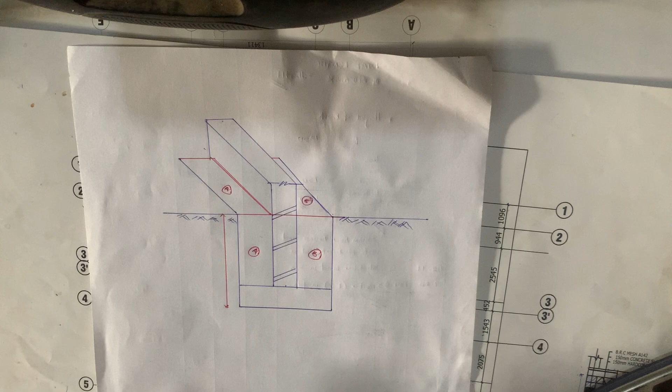In today's video we're going to be measuring for the backfilling in the foundation for a frame structure. This backfilling is the soil that we pour back into the foundation trench after we've laid our foundation footing and our block work.

As you can see in this drawing, this is our foundation trench. You remember that we've calculated the volume of excavation for our foundation trench. Now we need to determine what is the volume of material that we are going to be using to pour back into these spaces. As you can see, at this point marked A, we need to pour materials into this point, and we need to pour materials into this point. So how do we go about calculating for the volume of this backfilling?

Now this is how it is to be done. If you remember when you were doing your measurements as a beginner, measuring for your foundation trench, you would see something like 'anding on', or this sign that looks like 'and'. Let me just do it here. You'll see this sign like this.

Anding on, and they will note 'deduct backfilling and add material surplus'. Now that nomenclature tells you that you are supposed to do something for backfilling, although it is not really calculated during that measurement aspect. But what that means is that when you are going to do your bill of quantity, you have to also measure for the volume of material needed for that backfilling. I don't know if that makes sense. The nomenclature that says deduct backfilling and add material surplus is just to speed up the measurement process.

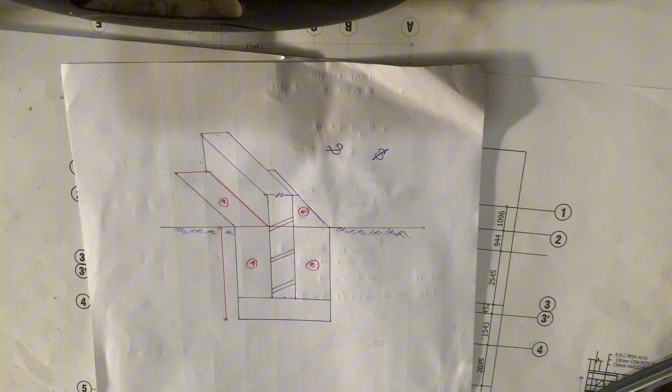But when you now go to do your bill of quantity, backfilling is also an item on its own that needs quantity for you to get the amount needed for the backfilling, so you need to also calculate for the backfilling separately. In this video I am taking my time to do everything properly so that in the future you will not have any problem. If not, I would have just gone ahead when measuring for the foundation trench, written deduct backfilling and add material surplus, and moved to the next one. But I am trying to take my time so that you can understand this properly.

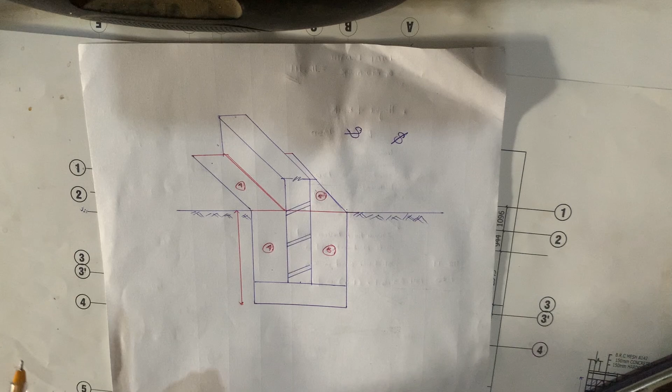So if you look at this diagram, this box here is the trench that we have excavated. I'm going to take you through the process so you can understand how to measure for this backfilling. This is our ground level, or our strip level rather. We've removed our topsoil, so this is our strip level. After that, we excavate for our foundation trench, like this. After excavating, we now lay our concrete in the foundation, right here. And after laying the concrete foundation, once it has set, we now started laying our block work.

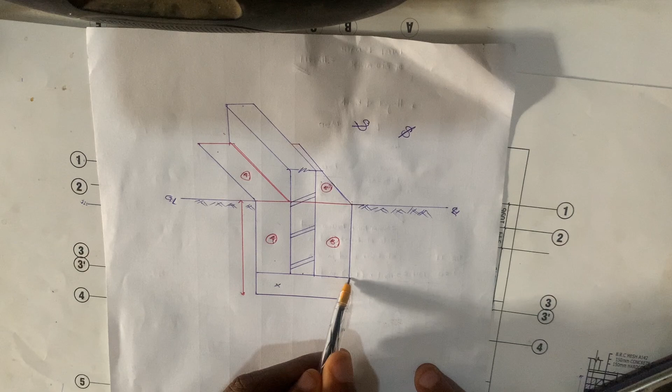So now, to determine the volume of A and B, we've already calculated the total volume of our excavation in our previous work. All we're going to be doing now is taking that volume of excavation in the trench and minusing the volume of our concrete footing inside the trench, because the volume of our excavation is in meter cube. So we need to minus this volume here. If we minus this volume, whatever remains is going to be the volume of this box on top, this total box on top.

Moving to wherever the perimeter of the foundation trench is in the drawing, so like I said, we've determined the volume of our earthworks. We will now minus the volume of the concrete footing, then whatever remains, we will now minus the volume of our block work.

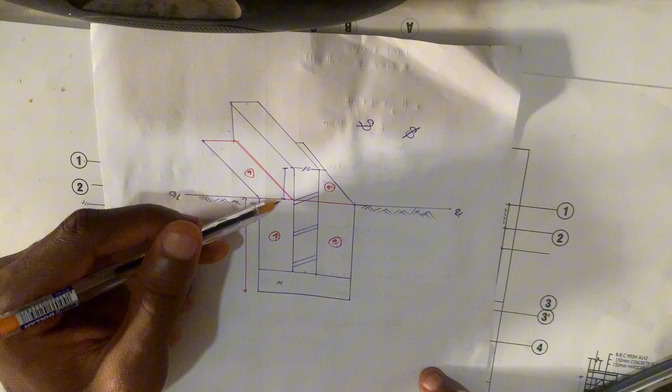Now, if you look at this drawing, the block work exceeds the foundation trench or exceeds the strip level. So we are only going to be taking cognizance of the block work within the excavation. From this point up, we don't need it because it is outside the excavation or outside the trench. What we are looking at is the block work inside the trench.

So it's more like, since we've gotten the volume of our excavation, we are trying to remove the volume of the obstacles inside the excavation. And what are the obstacles in this section? This, the concrete footing, and this, the block work. So we have to minus those volumes.

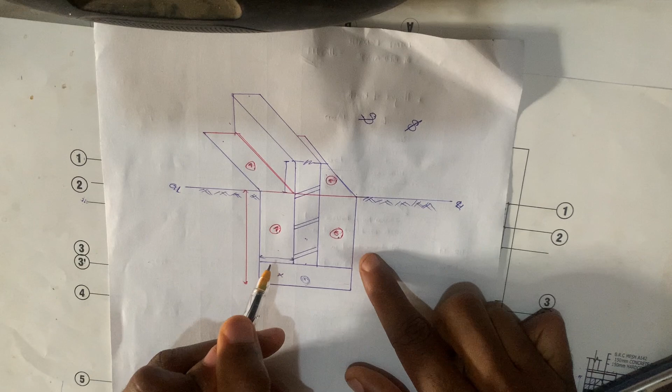So with this, we'll now begin our measurement proper. By the time we start our measurement, you are going to understand fully what is actually going on here. Another piece of information you should know before we move is that, remember, this is a frame structure. So we are going to be having the foundation trench and the trench for the column pit.

So we are going to be backfilling for both of them. We are going to be using the same approach that I've said in the beginning, but there are going to be little intricacies when it comes to the measurement. So I need you to pay proper attention as we are doing the measurement. It is very easy, all you just need to do is get the concept.

So we are going to be measuring for 2 backfillings, the backfilling for the trench and the backfilling for the column pit. When we get the volume of these 2 items, that's for the trench and the column pit, we'll add them together because backfilling is one work item. When you are doing your bill of quantity, you don't separate the backfilling for the trench and the backfilling for the column. They are the same work item, so you have to add them together.

So the first one we're going to be looking at is the backfilling for the trench. So we'll write backfilling for the trench.

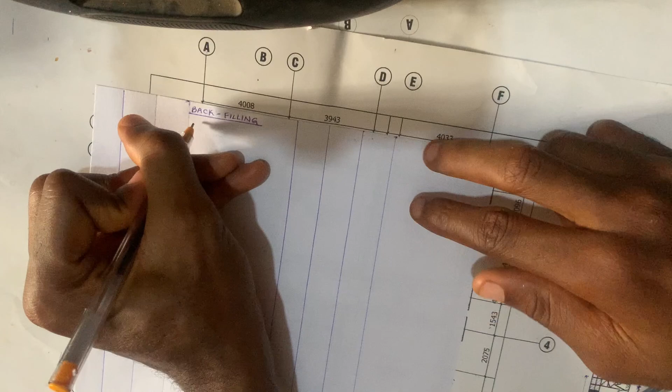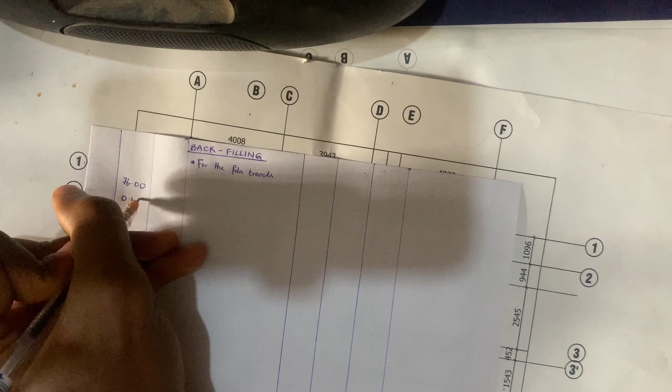So the first thing I'm going to be doing now is bringing out the measurement that you did for the foundation trench excavation, to get the volume of material that you'll be excavating for the foundation trench. In our previous video, we said that the total length of the excavation for the trench was 76.00 meters. The width of the trench was 675 millimeters, so that's 0.68. And the total depth of the excavation will be calculated as 1025, which is 1.03.

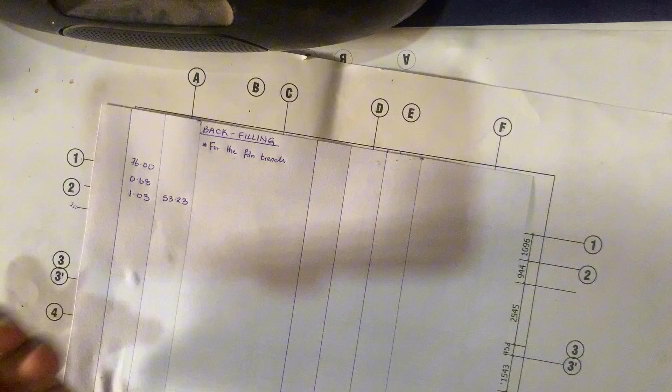So just to get a quick recap, this is it here. As you can see, foundation trench excavation not exceeding 2.0 meters deep. You can see this is the length, 76.00, the width is 0.68, and the depth we calculated of the excavation as 1025, which is 1.03, and the total volume is 53.23.

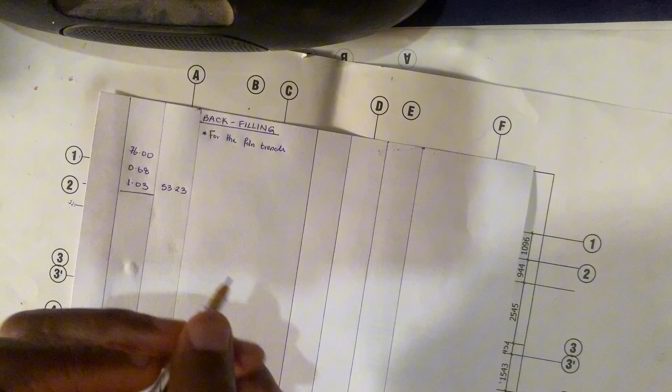So the next thing now we're going to be looking at is the deduction. Since we've gotten the total volume of the excavation, we now need to deduct, like I said, the volume of the foundation footing. I don't know if that makes sense, I've already explained it in the beginning of the video. So we're now going to deduct the volume of foundation footing in the trench.

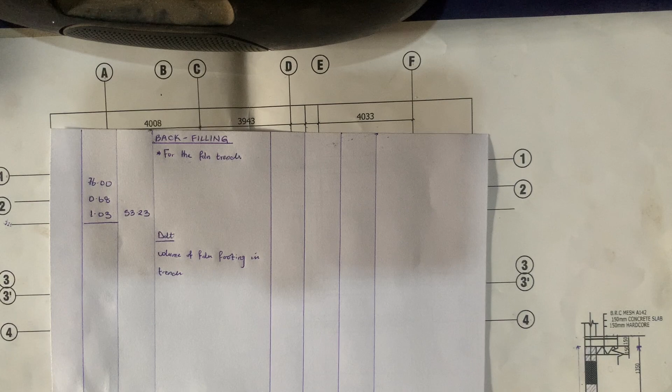So previously we calculated the volume of concrete in our foundation trench. In that video we said that we need 3 parameters, because volume of concrete to the foundation footing is what is measured in meter cube. So we need total perimeter of the concrete in the foundation, we need the thickness of the foundation footing, and then we need the width of the foundation footing. So we've already calculated our perimeter, or our length of the foundation footing, to be 76.00, because it is the same depth that we are excavating that we are going to be laying our foundation footing. I hope that makes sense.

So now it will now become 76.00, this is the perimeter, 76.00. And what is the width of the excavation? The width of the excavation is 675. So it means that if we are excavating 675, like it's had in this drawing, it means that the width of the foundation trench would be as wide as the 675. So it will now become 0.68. The thickness of the foundation footing, as you can see in this drawing, is 225, so that's 0.23.

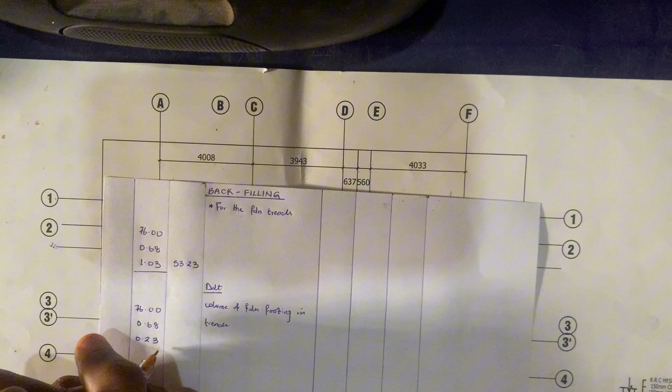And then you close. So you will now do the math. What do we have? If you calculate everything, you are going to get 11.89. So this is the total volume of the concrete inside the foundation trench for the foundation footing.

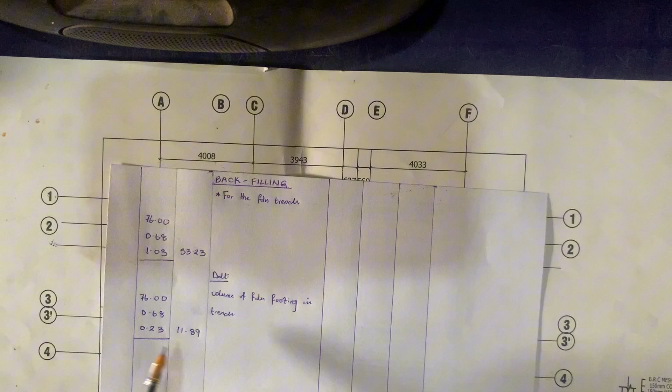So the next thing we're going to be deducting would be the block work inside the trench. That is this block work from here to here, as you can see, the block work inside the trench.

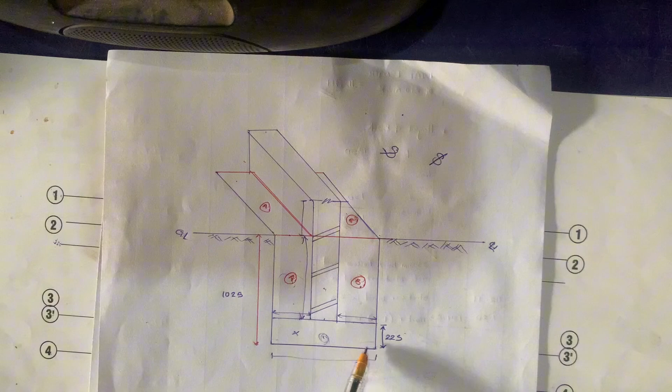So how do we get the length of this block work from here to here? We already calculated in our previous video when we were doing the calculation for the foundation trench excavation that the depth of the foundation trench was 1025. So if we want to get the height of the block work from this point to this point, all we need to do is minus the thickness of the footing from this dimension. Whatever we have will be the height of the block work from this point down to this point. So 1025 minus 225 is equal to 800. So the height of this block work from here to here is 800 mm.

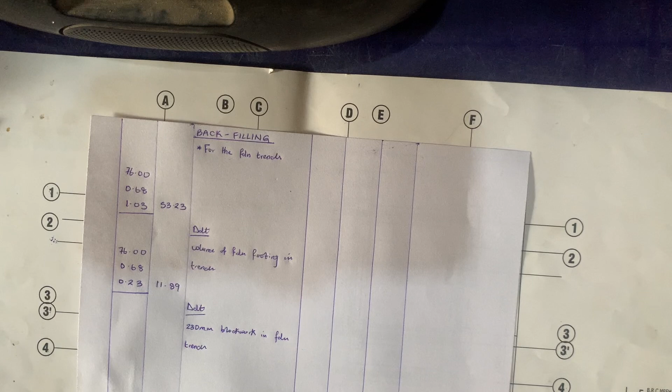So with that we can now deduct for our block work. We'll say deduct 230 mm block work in foundation trench. Now you know that block work is measured in meter square, but we are trying to determine the volume of the block work.

That's the volume. We need to determine the length, that's the thickness, the height, and the total perimeter that this block work will be laid in the foundation. If you remember when we were measuring for our block work, let me use this point as a case study. The block work in the foundation is spanning from one column point to another column point.

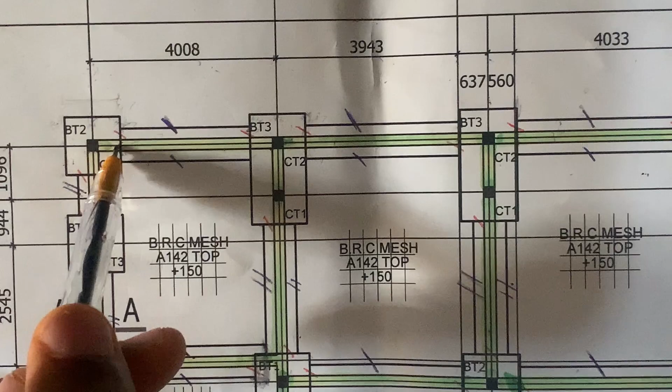But we need to mind that what we're looking for here is just the block work within the trench. As for the other parts within the column pit, we'll cater for that when we're trying to determine the volume of backfilling for the column pit. So all we need is just the volume of the block work inside the foundation trench, so we're not going to be using the total perimeter we calculated for our block work.

Because for the block work we measured from column to column. What we need is from the edge of the foundation to the other edge of the foundation pit. So the only thing we can use now is the total perimeter or total length of the foundation footing that we've already measured for.

Because if you look at this, if we want to get the total length of this block work here, it is the same thing as the total length of the foundation trench here. And we've already measured for the total length of our foundation trench.

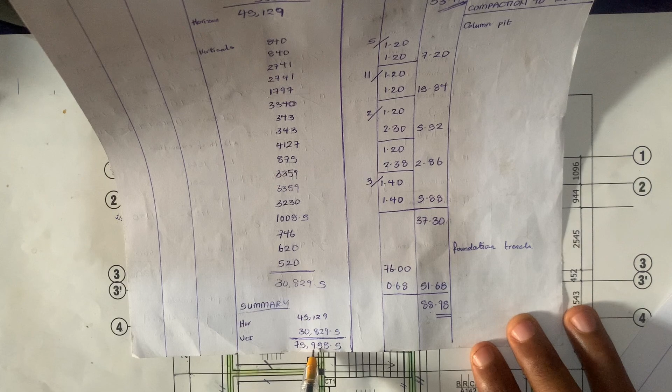So as you can see in our previous calculated work for the foundation trench excavation, we said that the total perimeter of the foundation trenches was 75,958.5, which is approximately 76.00 meters. So it means that the block work we are going to be laying for the foundation trench, the total is going to be the same as the total of the foundation trench itself, which we've already calculated as 76.00 meters. So we'll now book.

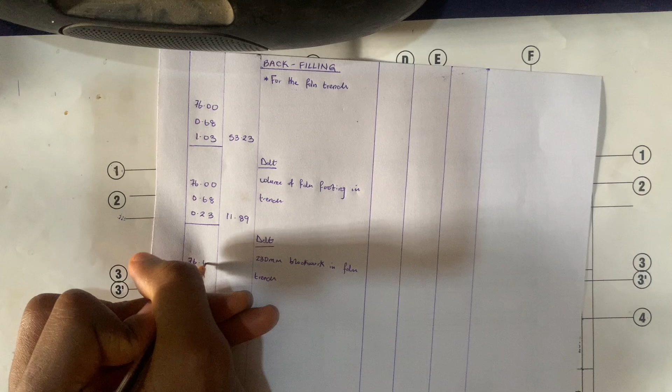So the first thing we are booking will be the total length, which is 76.00. The next thing we're going to be booking for would be the height of the block work, which we've calculated as 800.

So that's 0.80. And the next thing we're going to be measuring for is the thickness of the block work, which is 230, that's 0.23. With these, we'll get the total volume of the block work inside the foundation trench. I hope that makes sense. So we'll now do our math: 76 times 0.80 times 0.23 is equal to what?

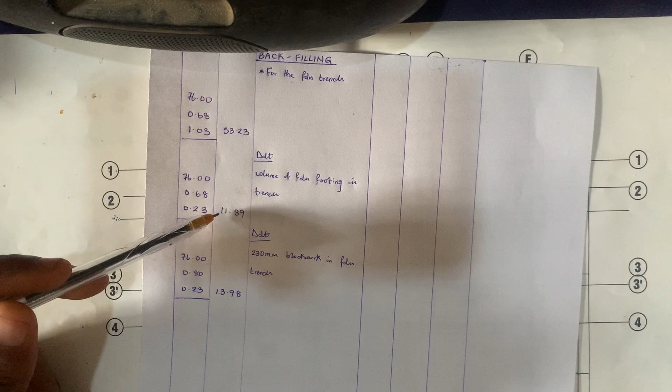13.98 - so this is the volume of our block work inside the foundation trench. So we're going to be deducting the volume of the block work inside the trench and the volume of the foundation footing inside the trench from the total volume of the foundation excavation, or the foundation trench excavation. So do the maths.

53.23 minus 11.89 minus 13.98. What are we having? We're going to be having 27.36.

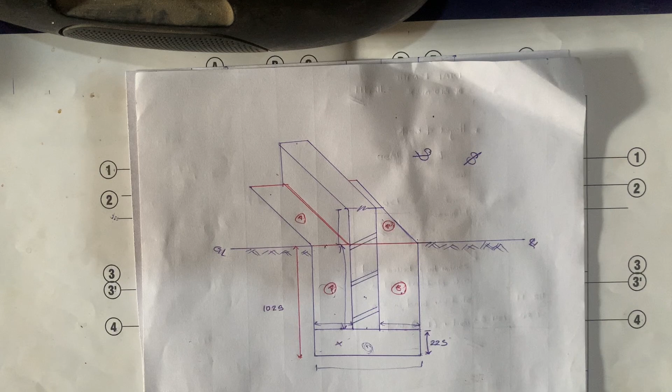So the next thing we're going to be looking at will be the backfilling for the column pit. To measure for the backfilling for the column pit, we're going to be using the same approach as we did for the backfilling for the foundation trench, meaning that we need the total volume of our column pit excavation. Then we're going to be deducting the volume of the column footing. Once we deduct the volume of our column footing, we'll now deduct the volume of the block work inside each of the column pits.

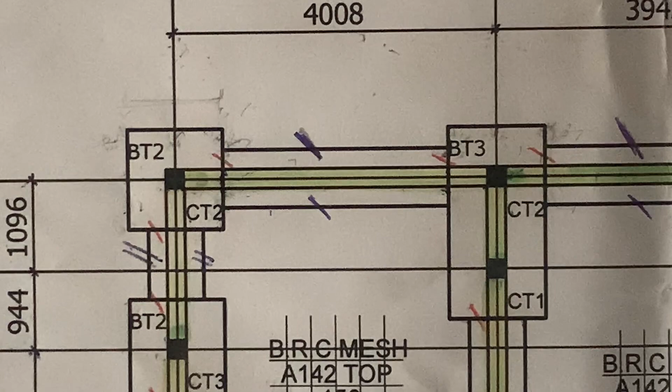Now the block work inside the column pit is now where we have a little issue, so let's just take things slowly. First we need to determine what is the total volume of our excavation for the column pit, and then we will now deduct the total volume of the concrete for our column footing. So let's start with that first.

So just a quick recap, you can see this is our column pit excavation, and if you remember, this is what we did when we were trying to measure the total volume of our excavation for our column pit. As you can see, the total volume we calculated was 42.89 meter cube. So this is the total volume of our excavation. So we're going to be bringing it now to calculate for the backfilling to the column pit.

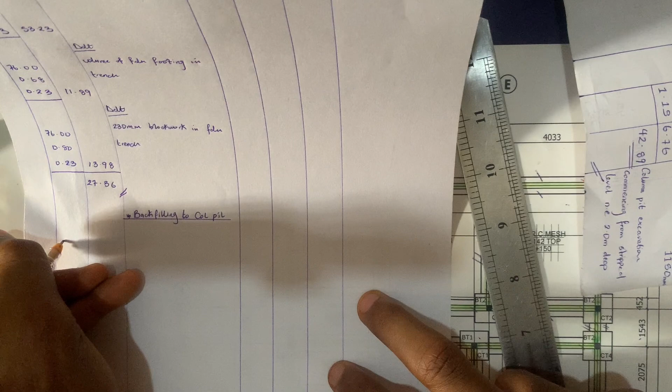So the volume of our column pit excavation is 42.89. So we'll bring this to the squaring column, and then we close. So the next thing now we're going to be deducting would be the total volume of our column footing.

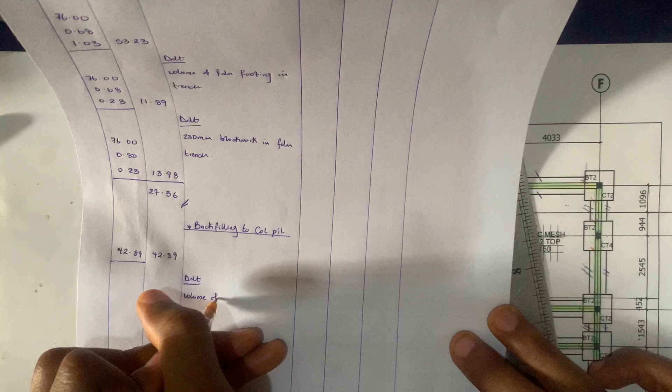And our calculated volume for our column footing was 13.06 meter cube. Now where I got this 13.06 meter cube is from our previous measurement. So let me just take you back.

So if you look at this, this was our leveling and compacting to the trench. I'm looking for this particular document where we did the measurements for the concrete for the column footing, but I can't find it. But we can also find our way using this. This is the leveling and compacting to the column pit, right? And leveling and compacting measured in meter square. So it means that this is the total area of our column pit.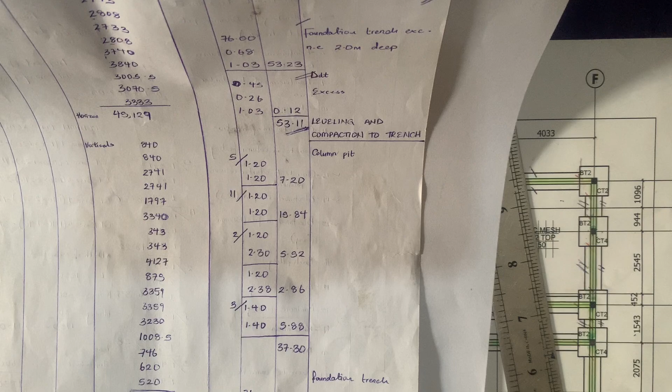37.30, and in our drawing the thickness of our column footing is 350 mm. So if we multiply area by another parameter, it will give us the volume of our concrete for the column footing. So 37.30 times 0.35 is going to give us 13.055, which is approximately 13.06. So it means that the total volume of concrete that we'll be needing for the column footing is 13.06 meter cube. So that is how we got this our 13.06 meter cube.

But you can go to the previous video when we measured for our concrete to our column footing, so that you can see if this is actually correct. So with this, the next thing now we're going to be deducting would be our block work inside the column pit.

Now this is where things get very tricky. First off, we are going to be defining our dimensions for the column pit.

We know that for column pit 1, that's base type 1, the dimension was 1200 by 1200. For base type 2, the dimension was 1200 by 1200. For base type 3, the dimension was 2296 by 1200. For base type 4, the dimension was 2378 by 1200. And for base type 5, the dimension was 1400 by 1400.

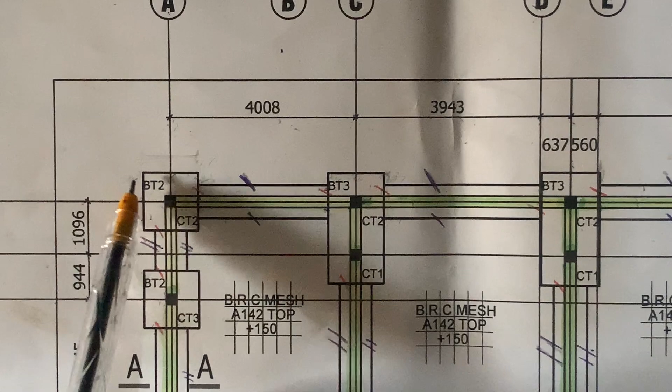But now inside each of these column bases, there is an intersection between 2 or more block works. So let's start with base type 2. Base type 1 and 2 have the same dimension, 1200 by 1200. So now for this base type 2, the dimension is 1200 by 1200, and you can see that there are 2 intersections of block work, one coming this way and one coming this way. We still have another one.

Now for the intersection, we're going to be using the center of the column point, this black stuff here, which is our column, as the point of intersection. So we have a blockwork intersecting this column and another blockwork intersecting this column, meaning that there are two intersections.

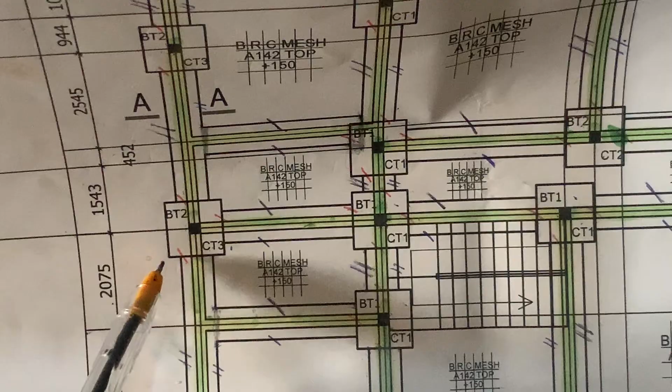Now if you look at this one again, base type 2, there's a blockwork intersecting the column, and there's another blockwork intersecting the column, making it two intersections. Now if you look at this one, this is another base type 2 with a dimension of 1200 by 1200. But how many intersections are we seeing? 1, 2, and 3.

Similarly, if you look at this one here, this base type 1, 1200 by 1200, and how many intersections are you seeing? 1, 2, 3.

So what we are going to be doing now is basically this: we are going to be measuring the volume of the blockwork based on the number of intersections that we have inside the column pit. I don't know if that makes sense.

So for base type 1 and base type 2, it is very easy, straightforward, because they have the same dimension of 1200 by 1200. So now the only difference is that for base type 1 and base type 2, there can be two intersections. Some will have 3 intersections, some will have 4 intersections. 4 intersections in the sense like, look at this one here: 1, 2, 3, 4.

So all we need to do now is to define them by the number of intersections. So that's what we're going to be doing. When we define them by the number of intersections, we are now going to be determining the total perimeter of this blockwork inside the column pit.

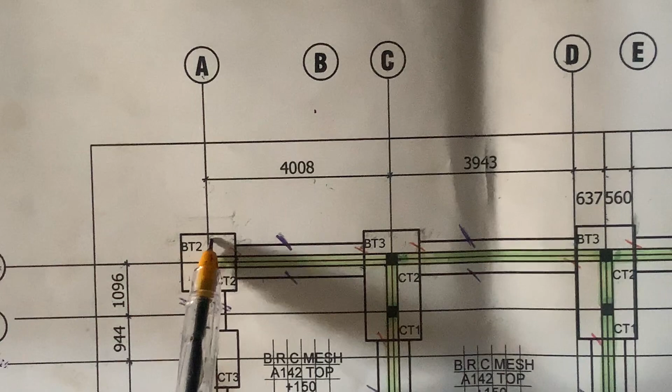So for example, now for the one of 2 intersections, if you look at this, this is the center, through call out A. So the dimension, the center line from this point down to this point will be half the length of base type 2. We know that the length of base type 2 is 1200. So it means that the dimension from this point down to this point of the blockwork will be 600.

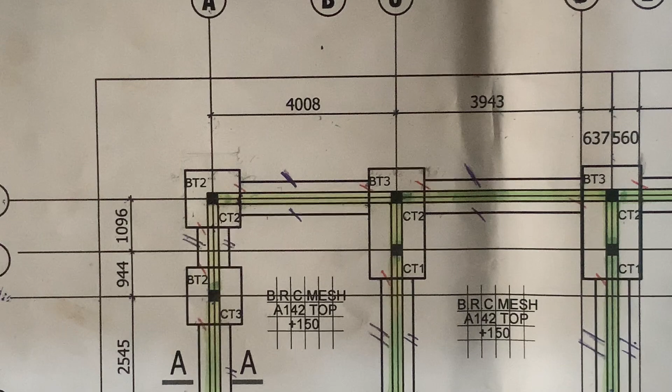And similarly, from this center point down to the end of this blockwork here in the column pit will also be 600. So it doesn't matter if the intersection is given an L shape or a straight shape like this, as far as they have the same dimension of column pit, it is going to be the same. So we know that from here to here is 600, from here to here is 600, meaning that this obstacle here, the total length will be 1200, because 600 plus 600 is 1200.

So similarly, we have this center. We want to determine the perimeter of this blockwork here. So we know that from here to this center line is half the length of the column base, which is 600, and from here to here is also half the length of the column base, which is 600. So from here to here is 1200, meaning that the length of this obstacle here is 1200. I don't know if that makes sense.

What we're going to be doing now is that we're going to be bringing them out individually. We're going to be looking for the base type with a dimension of 1200 by 1200 with 2 intersections.

So now we're going to be counting. And this is 1, because it's base type 2, it has 1200 by 1200. This is 2. This is 3. This is 4.

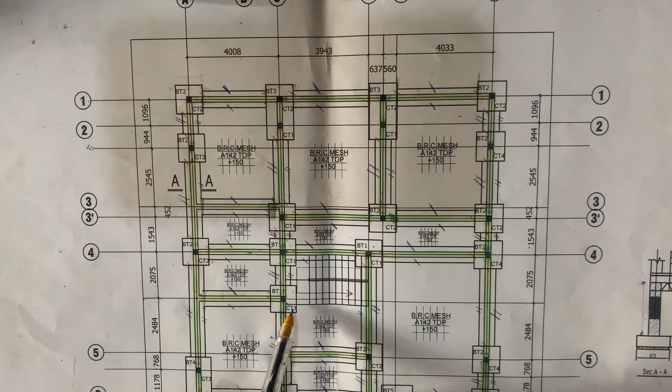This is 5. Let me try and move this. This is 6. So there are 6 in number. We are not calculating this one because this base type was 5.

So we are looking for the ones with 2 intersections that are base type 1 and 2, because base type 1 and 2 have the same dimension of 1200 by 1200. So let's count again.

So this base type 2 with 2 intersections, this is 1. Another base type 2 with 2 intersections, this is 2. Another base type 2 with 2 intersections, 3. Base type 2 with 2 intersections, that's 4. Another base type 2 with 2 intersections, making it 5. Another base type 2 with 2 intersections, making it 6.

So is there any other one? No. So it means that the base type with the dimension 1200 by 1200 with 2 intersections is 6 in number. So we'll now write.

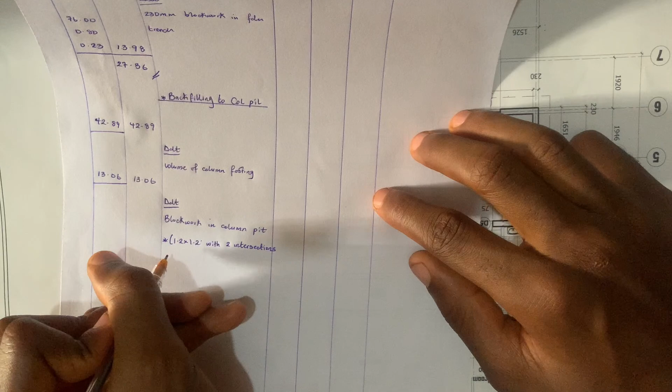1.2 by 1.2 with 2 intersections is equal to 6 in number. And we said that the perimeter of the blockwork, the obstacle inside, if they have 2 intersections, is going to be 1200 in length. So the length will now be equal to 1200. So we'll now move to the next one.

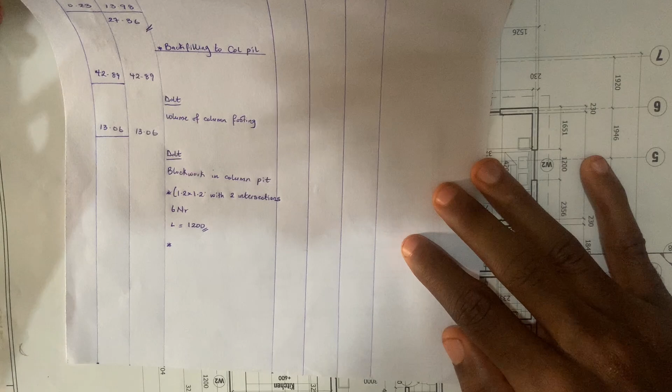So the next one now is the column pit with 1200 by 1200 with 3 intersections. So we're not going to count yet, so let's just do it here. 1200 by 1200 with 3 intersections. So we now have to count.

So this base type 2, 1200 by 1200 with 3 intersections, this is 1. Another base type 2 with 3 intersections, this is 2. Another base type 2 with 3 intersections, this is 3. A base type 1 with 3 intersections, this is 4. A base type 2 with 3 intersections, this is 5. A base type 1 with 3 intersections, this is 6. A base type 2 with 3 intersections, this is 7. So is there any other one again? No. So there are 7 in number.

Let's count again. So base type 1 or 2 with 3 intersections, that's what we're looking for. This is base type 2 with 3 intersections, 1. Base type 2 with 3 intersections, 2. Base type 2 with 3 intersections, 3. Base type 1 with 3 intersections, 4. Base type 2 with 3 intersections, 5. Base type 1 with 3 intersections, that's 6. Base type 2 with 3 intersections, that's 7. So this is making it 7. So they are 7 in number.

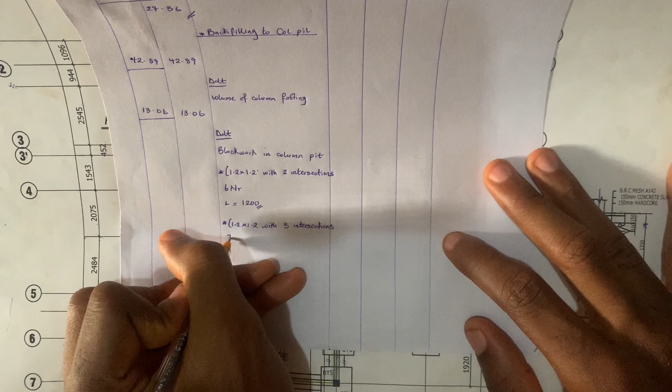So now, book. So now what will be the length? To determine the length, let's just use this one as an example. We know that we've already calculated the length for 2 intersections as 1200. So it means that the dimension from here to here is 1200, meaning that this obstacle here will have a length of 1200.

So now we want to determine what is the length of this other one here. Now we're not going to be starting from the center line. If we start from the center line, by the time we do our measurement, we now have to deduct for this little half here. Instead, so that we don't waste our time, we are going to be starting from the edge of the column to this other edge. So it means that we would have gotten the total volume for this side, and then we'll now just add this volume here. I don't know if that makes sense.

So now we've gotten the length of this blockwork here as 1200. So we need to determine what is the length of this smaller one here, starting from the edge of the column itself. So now, since we know that from the center line to this point is half the length of the dimension of the column pit, which is 600, right? We'll now minus half the thickness of the column. So when we minus half the thickness of the column, whatever we have will be the dimension from the edge of the column down to this edge of this blockwork.

So it means that anyone that has 3 intersections and is a base type 2 or base type 1, the length of that 3 intersections is 1683. So now we book that. This is the length of the obstacle for a base type 1 or base type 2 with 3 intersections. The next thing we are going to look at is base type 1 or base type 2 with 4 intersections.

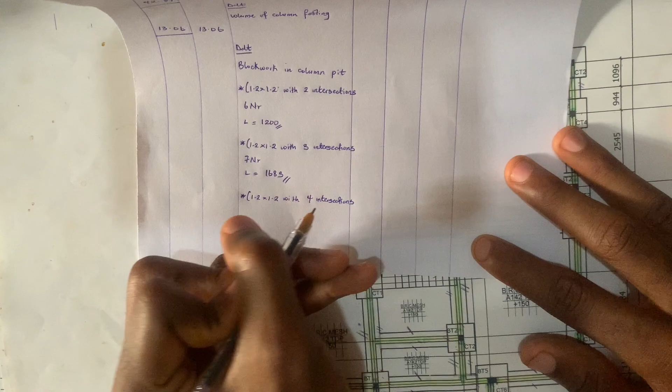So if the length of the column pit is 1200 by 1200 with 4 intersections, then we now have to count them. So we'll now start with base type 2 or base type 1 with 4 intersections.

So this is a base type 1 with 4 intersections. This is 1, 2, 3, 4. So this is making it 1.

So this is a base type 1 with 4 intersections, as you can see, cross this, this, this, and this. So this is making it 2.

And the last one is this one here. This is a base type 1 with 4 intersections. 1, 2, 3, 4, making it 3 in number. So we'll now book that they are 3 in number.

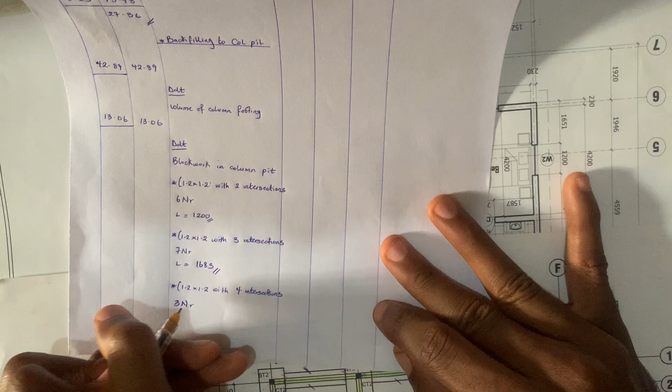So we now need to determine the length of that 4 intersections. For that of 3 intersections, we said that the smaller part here is 485. So for the 4 intersections, it means that this smaller part is going to be on 2 sides.

So now what we're going to do is this: since we know that here is 1200, here is 485, that means the next one here to make the cross will be another 485. So this is what I mean. We know that this length is 1200, and this one we've calculated as 485, so this 485 will be the same thing as this one here, 485.

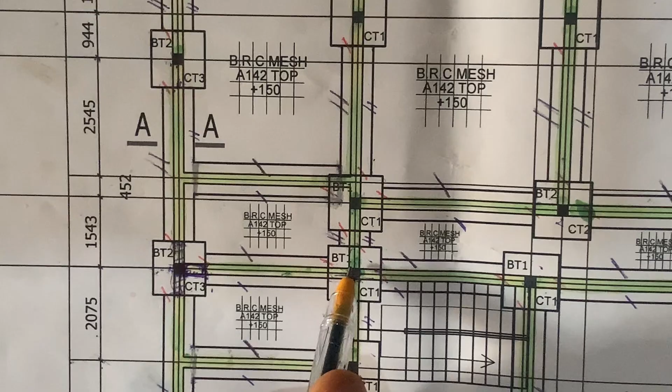So now to get the total length of this cross, it will now become 1200, which is the length of this straight one, plus 485, which is the length of this one, plus another 485, which is the length of this one, and that will be equal to 2170. So it means that for a base type 1 or 2 with 4 intersections, the total length of that obstacle is 2170.

It doesn't matter how they come, as far as it's 4 intersections, like for example this one now, it's still going to give you the same 2170. It's just that instead of this block work giving it a cross, they extended it to the top. So we'll now record 2170, and then we close.

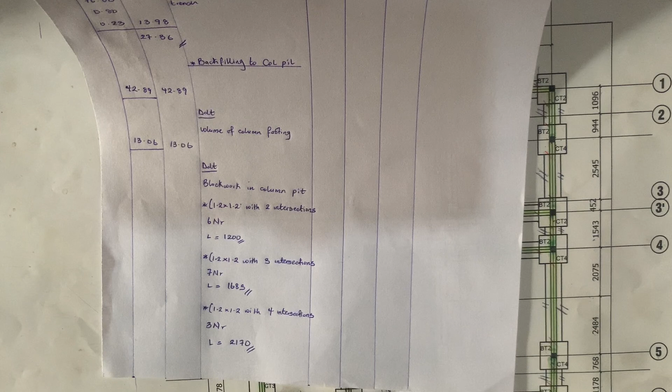So the next one we're going to look at is base type 5 with 2 intersections. We know that the length of base type 5 is 1400 by 1400. So we'll now count: you have one here and you have another one here. So it means that base type 5, that's 1400 by 1400 with 2 intersections, is 2 in number.

So we'll now record that, 2 in number. So the next thing we have to do is determine the length of the intersection, that's this block work inside. As you can see, call out 7 is passing through the center, so it means that from here to here will be half of the length of column base 5. We know that the length of column base 5 is 1400, so half will be 700.

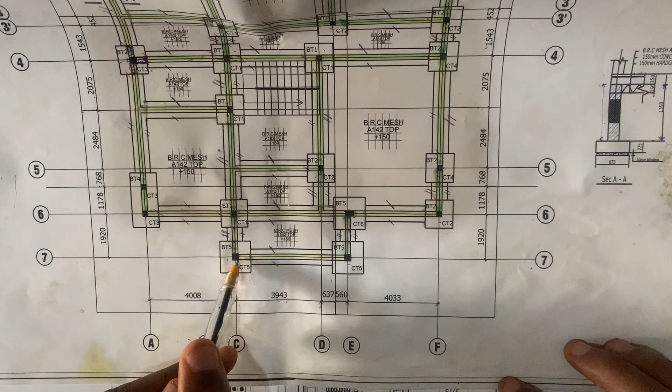So if from here to the center point is 700, similarly from this center point, call out C, down to this other edge will be 700. So it means that the total length for this L shape is going to be 1400. So we'll now record that the length is equal to 1400.

So the next one we're going to look at is base type 5 with 3 intersections. So we'll now write 1.4 by 1.4 with 3 intersections.

So 1.4 by 1.4 with 3 intersections, we now count. As you can see, this is the only one we have. A base type 5 with 3 intersections. That's this 1, 2 and 3, making it 3 intersections. So it is 1 in number. So we'll now record.

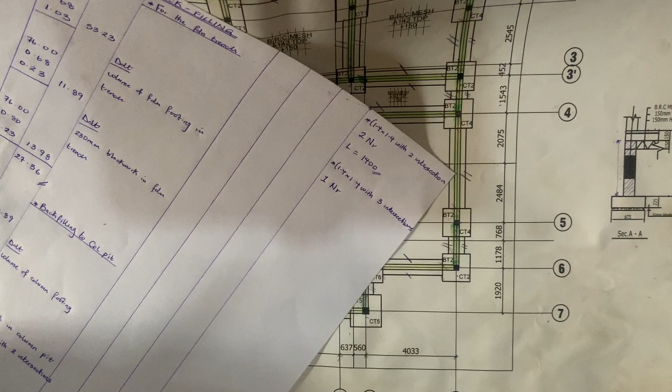So what is the length of this 1? We know that with 2 intersections it is 1400. So it means that this straight one here, we can use it as 1400. So we need to determine what is the length of this particular one here.

So we know that from this column, passing through the center down to the edge of the column base, is half of the length of the column base. So if from here to here is 1400, half will be 700, meaning that from this center point down to the edge is 700.

So we need to minus the thickness of this column at this shorter side, and we said that this shorter side is 230. So half of 230 is 115. So we have to minus 115 from 700 to get the total length of this block work here. So 700 minus 115 is equal to 585. So 585 is the length of this block work here, this small one.

So we'll now add this to this block work here, which we've calculated as 1400. So plus 1400 is equal to 1985. So we'll now record.

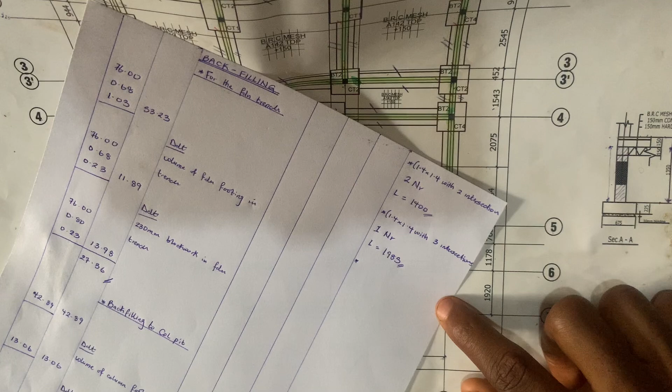So the length is equal to 1985. So the next one we're going to be looking at is base type 3. And the dimension of base type 3 is 1200 by 2296. So approximately 2.30.

1.20 by 2.30 with how many intersections? With 2 intersections first. So with 2 intersections, so we have to count. So this particular base type is base type 3.

Now we know that this base type 3 has multiple intersections. We have 1, we have 2, we have 3 and we have 4. But we have to make things easy for ourselves. We are going to be taking it one by one.

So this is this and this is this. So first things first, we are going to be determining what is the length of this one. And as you can see, we have this particular type in 2 places. So they are 2 in number. So we're going to be saying that this is 2 intersections. This is 1, this is 2. This is 1, this is 2. So they are 2 in number.

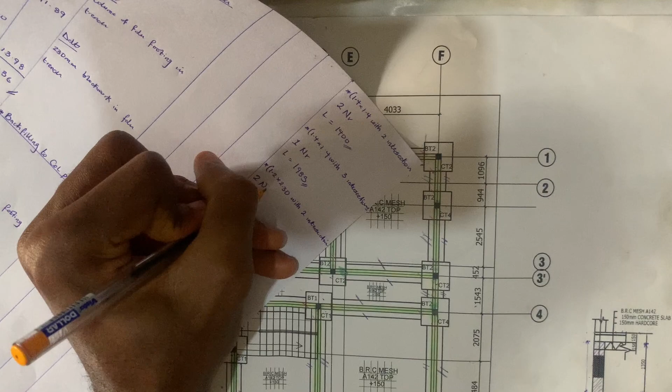So we need to determine the length. So now we know that this shorter side is 1200, meaning that from here to this point is 1200. So now we need to determine what is the length of this longer side from the edge of the column down to this edge of the column pit.

And now how do we do that? We know that from this point down to this point is given as 2,296. So what we can do now is to minus this point here, and in our drawing they've given it to us as 600. So if you look at this drawing, base type 3, they told us that from this point down to this point is 600.

So what we can do is this. As you can see, they've even made it easy for us in the drawing. They've told us that from this point to the edge of the other column is 1096, and from this edge to the other edge is 600. So 1096 plus 600 is equal to 1696. So it means that from this center point down to this edge is going to be 1696.

But mind you, we have to minus the half of the thickness of this column, because it is intersecting and we don't want to stress ourselves to start doing deduction. So we have to do the deduction now. So we'll be minusing this half of the column. So the column is 230.

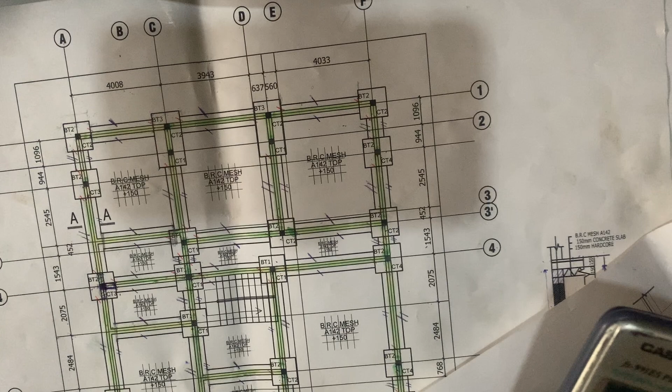So we'll now half, will now be 115. So 1696 minus 115 is equal to 1581. It means that the dimension from this edge down toward this edge of this block work is 1581. So we'll now add it towards this length that we have for this straight one. We said that this length is 1200. So plus 1200 will be equal to 2781. So it means that the dimension for this T block work here is 2781. So we'll now record.

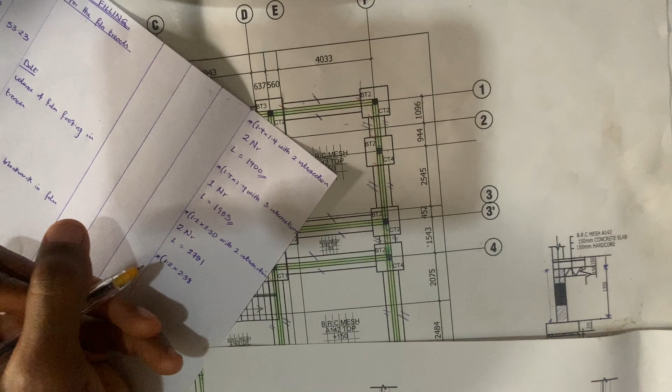The next one we're going to be looking at would be 1200 by 2378, and that's base type 4. So we'll now write. So this is 1.2 by 2.38, which is base type 4. So with how many intersections?

With 2 intersections. Do we have one with 2 intersections? No, we don't have one with 2 intersections, but we have one with 3 intersections. So this is 1, this is 2, and this is 3. But we're going to be making things easy for ourselves. We're going to be turning these to 2 intersections so that we can cater for this one, and then we can cater for this longer one. So we can now see with 2 intersections.

So how many are they in number? It is just 1, because this is the only one we have in the drawing, just this one. So to determine the length of this L-shaped block work here, we have to determine the length of this part from this center point, colored A, down to the edge. So we know that the length for this shorter side of the base, the column pit, is 1200. So half of it will be 600, since colored A is passing through the center, meaning that from this point to this point is 600.

So similarly, we have to determine what is the length from this point down to the center line for the longer side. As you can see in this drawing, they've told us that from this point, this center point, down to this center point is 1178, and from this center point to this edge is 600. So you have to add everything together. 1178 plus 600 is equal to 1778. So it means that the dimension from this point to this point is 1778, meaning that the length of this block work for this longer side from this edge down to this center point is 1778.

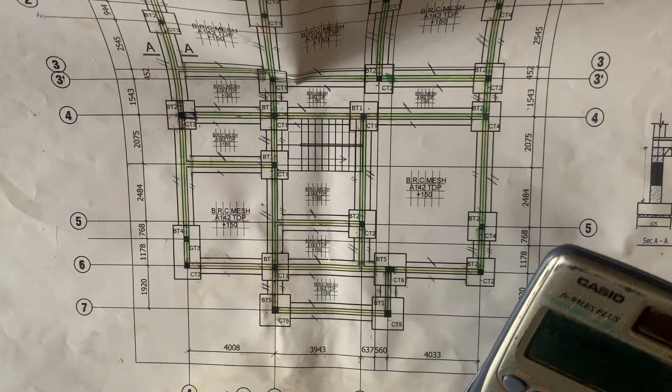So we'll now add that towards this shorter side, which we calculated as 600. So plus 600 is equal to 2378. It means that the total length of this L-shaped block work is 2378. So we'll now record. So the length is 2378. So with this, we've already gotten the dimension of all the block works intersecting inside the column pits.

So what we're now going to be doing is we're going to be trying to get the volume of those block works, and then we'll now be deducting it from our calculated volume of the excavation for the column pit. So let's get right into it.

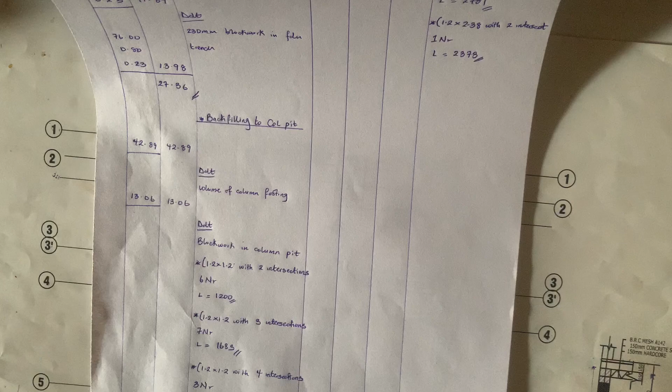So to get the volume of these block works inside the column pit, we've already determined the length. So the next parameter we're going to be needing is the thickness of the block work, which is 230 mm. And then the next parameter we'll be needing is the height of the block work. So to determine the height, if you remember in our previous calculation for the column pit, we've already done the depth of the excavation to be 1150. So it means that if this were the diagram for our column pit excavation, this would be 1150.

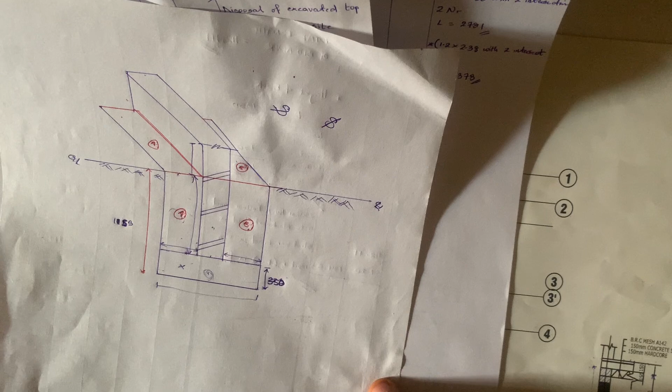The thickness of our column pit, the thickness for our column footing, is given as 350, as you can see in this drawing here. So what we are going to be doing now to get the total height of this block work is the same as we did in our foundation trench. 1150 minus the thickness of the column footing, which is 350, will give us the height of this block work. So 1150 minus 350 is equal to 800, the same as we got in our foundation trench for the block work. So we will now record.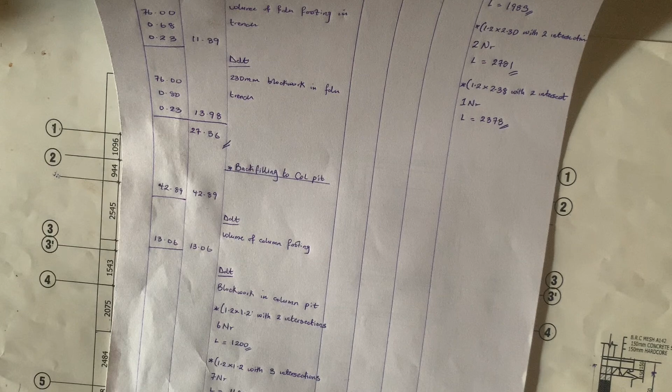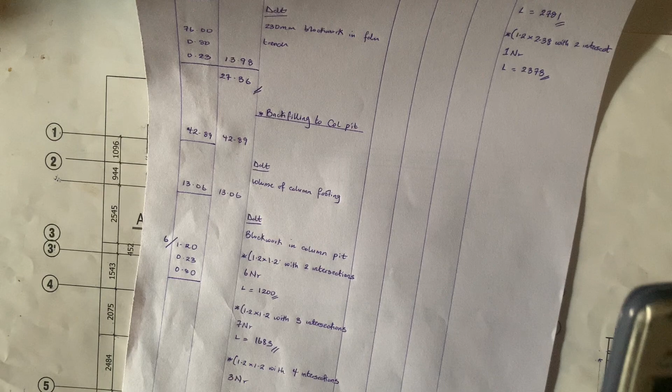So we'll now start with this first one. The length is 1200, which is 1.20. The thickness is 0.23, and the depth or height of the block work is 800, which is 0.80. So 1.20 multiplied by 0.23, multiplied by 0.8, then multiplied by 6 in number, is equal to 1.32. So the total volume of all 6 block works with 2 intersections inside this particular column pit is going to be this.

So we'll now move to the next one, the one with 3 intersections. The length is 1685, so 1.69 by 0.23 by 0.80 by 7 in number, and then we close. So 1.69 times 0.23 times 0.80 times 7 is equal to 2.176, approximately 2.18.

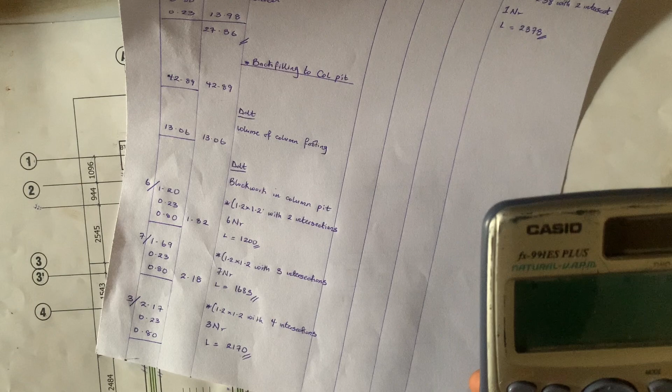So we'll now do the next one, 1.2 by 1.2 with 4 intersections. The length is 2170, so 2.17 by 0.23 by 0.80 by 3 in number, and then we close. 2.17 times 0.23 times 0.80 times 3 is equal to 1.197, approximately 1.20.

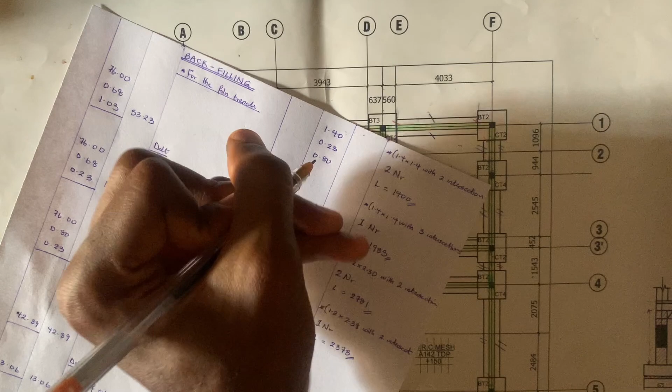So we'll now move to the next one, the 1.4 by 1.4 with 2 intersections. We've already calculated the length as 1.40. So 1.40 by 0.23 by 0.80 multiplied by 2 in number, and then we close. 1.40 by 0.23 by 0.80 multiplied by 2 is equal to 0.515, approximately 0.52.

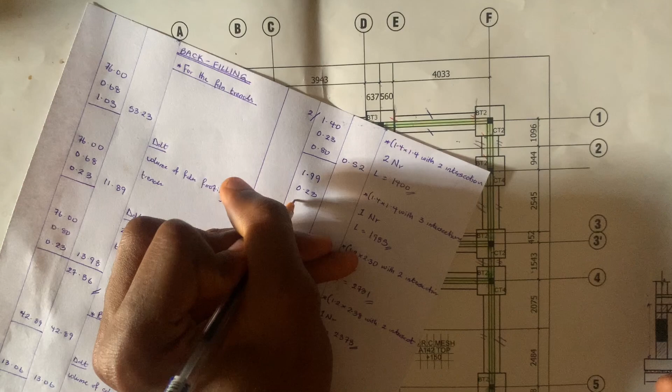So we'll now do the one with 3 intersections. The length is 1985, so this is 1.99 by 0.23 by 0.80, and it is one in number, so we'll now close. 1.99 times 0.23 times 0.80 is equal to 0.366, approximately 0.37.

So we'll move to the next one, which is 1.2 by 2.30 with two intersections, and they are two in number. The length is 2781, so that's 2.78 by 0.23 by 0.80, and they are two in number. So we'll do the maths. 2.78 times 0.23 times 0.80 is equal to 0.5115, multiplied by 2 in number, which is 1.023. So this is 1.02.

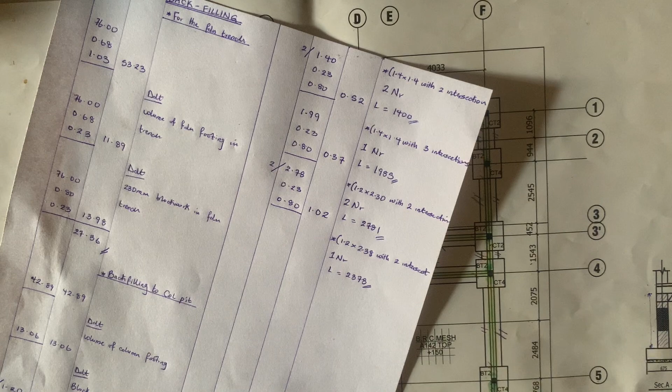So the last one will be this one: 1.2 by 2.38 with two intersections, one in number. So it's 2.38 by 0.23 by 0.80, and then we close. 2.38 times 0.23 times 0.80 is equal to 0.437, approximately 0.44.

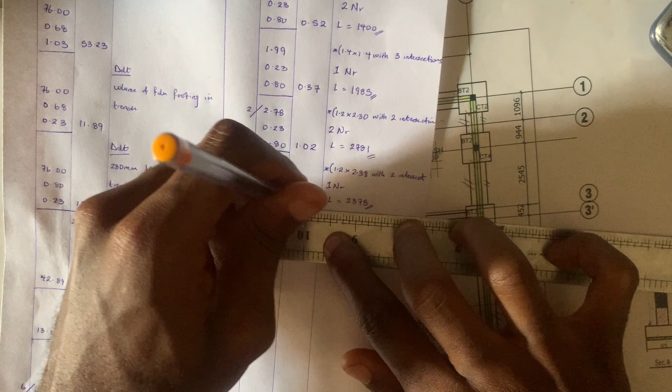So doing this, we've calculated the total volume of all the block work inside the column pit. So what we'll now do is deduct it. We're going to do all our deductions. So this is the total volume of the excavation for the column pit, 42.89. We're now told to deduct the volume of the column footing, which we calculated as 13.06. Then we'll now start deducting all the volumes of the block work we've calculated.

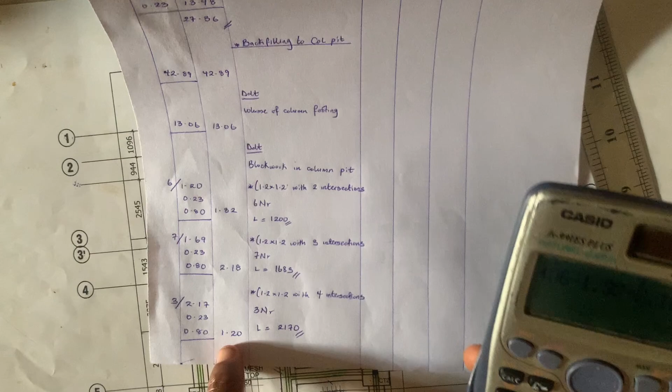So the first one is 1.82. The next one is 2.18. The next one is 1.20. The next one is 0.52. The next one is 0.37. The next one is 1.02. The next one is 0.44.

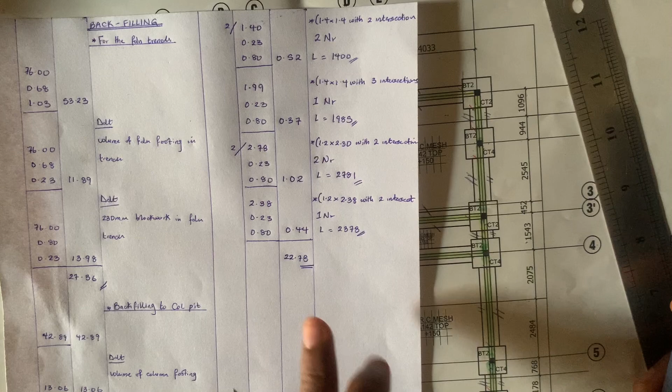So when you do the math, you're going to be having 22.78. So 22.78 is the total volume of material that you're going to be needing for backfilling to the column pit. So we'll now book it. So we'll now do our summary.

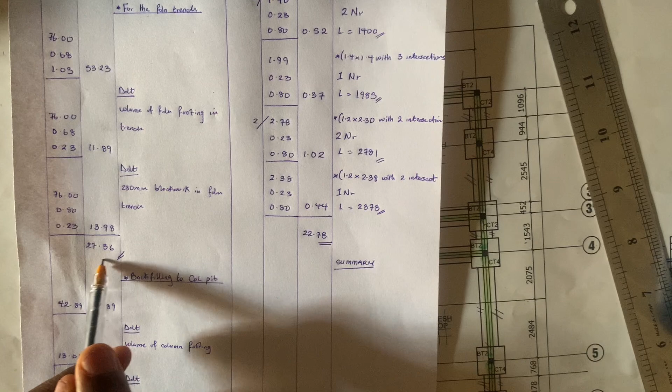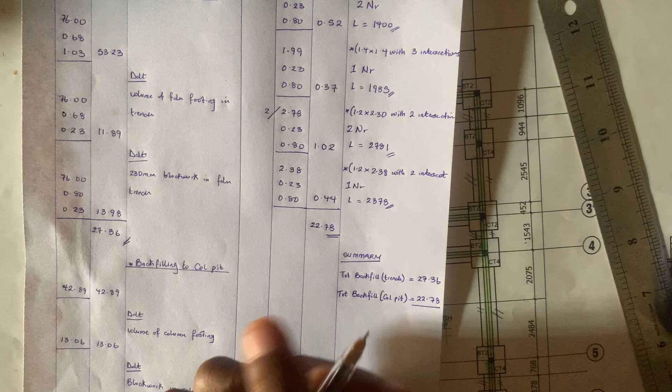So to do our summary, we have to add the total volume of backfilling we've done for our trench and the total volume of backfilling we've done for our column pit together. So we'll now write: total backfill trench will now be equal to what we've measured, 27.36. So the next one, total backfill to column pit, we've calculated as well, 22.78. So when you add the two of them together, 22.78 plus 27.36 is equal to 50.14.

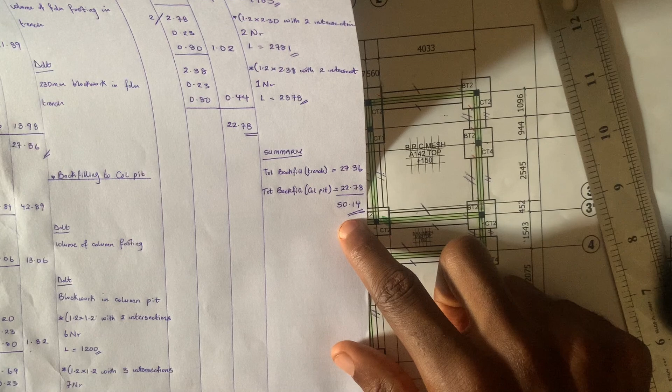So 50.14 is the total volume of material that you're going to be needing for your backfilling for both the foundation trench and for the column pit. So with this, we've measured our total volume of materials for our backfilling for the foundation. So with this, we've come to the end of today's video, guys.